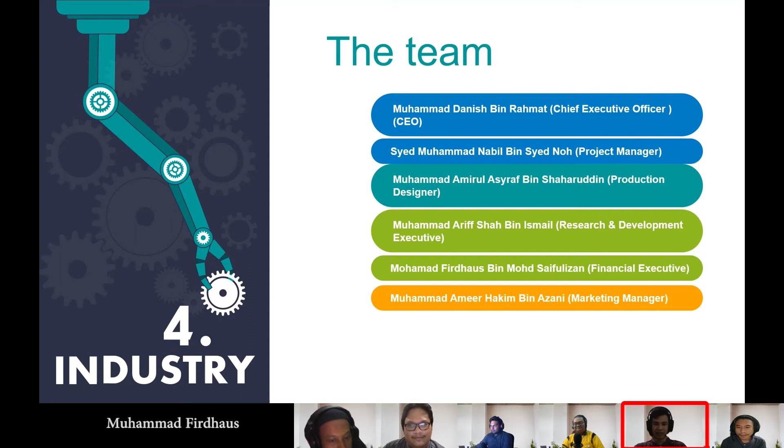So for our company background, first our company profile. Samsan Tech Team is a Malaysian tech-based company that explores the world of automation and robotics to meet the global growing demand and supply. We are specialized in designing, manufacturing, marketing, and consistently improving lawnmowers for various kinds of industrial and commercial use. We also inspire to be a leading company in the globe in the field of designing and manufacturing lawnmowers.

So our company location is in Savanna Lifestyle Retail, B-G-28, Jalan BBLS 2, Bandar Baru Lembah Selatan, in Dengkil, Selangor.

So for our nature of business, Samsan Tech Team is formed to produce a product with an addition of innovation to the product. Next is to produce a product with high quality and improvement to the current existing product in the market. Third, we will produce a very high technology product line in line with the current market status, which is Industry 4.0. Then lastly, we will continue to produce products with improvements that are user friendly and can help to ease our daily life.

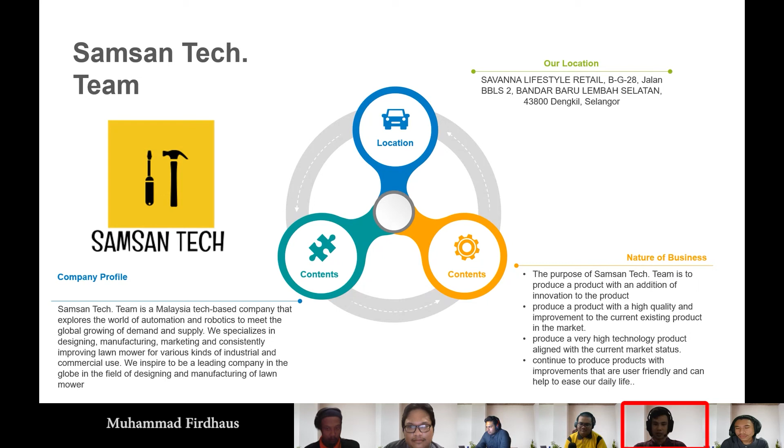So why do we need innovation? First is to catch up with advances in technology. The connectivity and integration of data means more revenue streams are being created. Second, established firms that leverage existing assets in exciting and profitable ways.

Why we need innovation also is to maximize the globalization of connectivity, to adopt a free market economic system, hugely increasing their own productive potential and creating fresh opportunities for international trade. Third is to reduce the barrier to global trade and bring new global agreements for promoting trade in goods, services and investment. Lastly is to completely outperform its competitors and venture into new markets by enhancing customer experiences.

I will pass to Syed Muhammad Nabil.

Hello, my name is Nabil. So I will be explaining about the background of the existing product when we took the initiative to make some innovations regarding the product. So the existing lawnmower that we always use has a lot of disadvantages. In this explanation I will divide this into two things: why the product needs to be innovated, and second, the problems that we are facing with this product.

So as a conventional lawnmower, it is used by the public to cut grass. The blades of the lawnmower are generally powered by pushing the mower forward. So this is very basic. So the problem with the conventional lawnmowers we use nowadays is that it uses gas as its power source. And with gas powered lawnmowers comes pollution. So our product would reduce pollution.

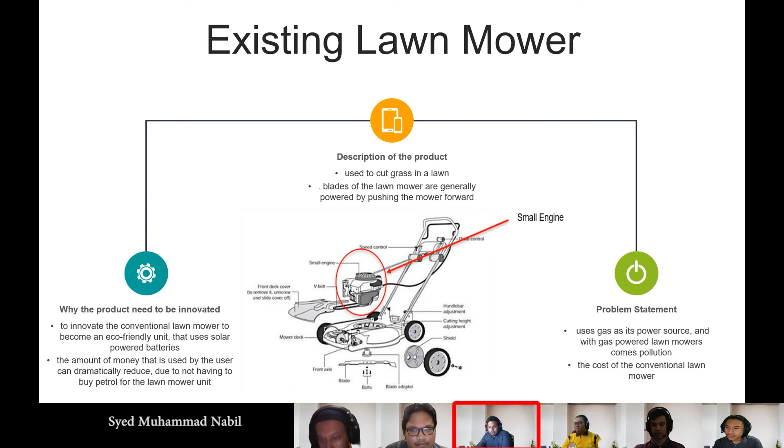Also, conventional lawnmowers cost a lot for people to buy these days. So the difference between our product and the conventional lawnmower is that our product uses solar powered batteries, which is very eco-friendly. Secondly, the amount of money used by the user can dramatically reduce due to not having to buy petrol for a conventional lawnmower. That's it for me. Now Arif will continue the slide.

Now I will continue with the innovation of the product. The types of innovation that we will choose are two types: radical and also architectural. Can we go to the next slide, please? Thank you. Okay, now I will continue with the radical type of innovation.

Connecting a controller to the internet, the action of the autonomous lawnmower can be coordinated and automated to a greater extent than ever before. It can complete tasks intelligently with minimal human input. Next, it has a means to perceive the lawnmower's surroundings to determine precise localization, accurately detect and fix moving objects, and measure distance to those objects.

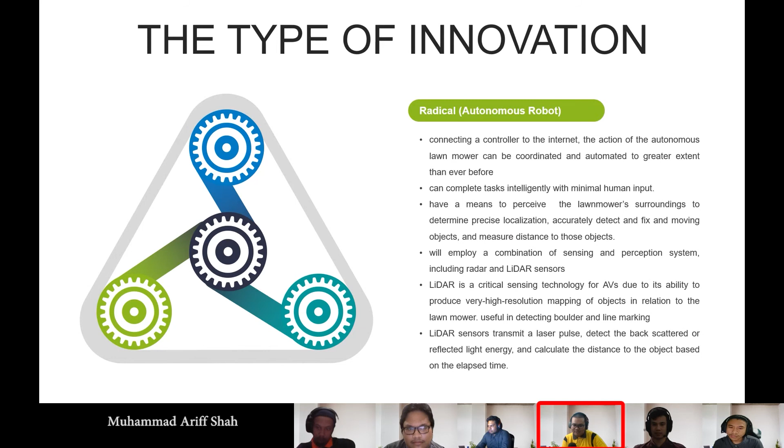Next, we employ a combination of sensing and perception systems, including radar and LiDAR sensors. LiDAR is a critical sensing technology for AVs, that is automated vehicles, due to its ability to produce very high resolution mapping of objects in relation to the lawnmower, useful in detecting boulders and line marking. The LiDAR sensor also transmits a laser pulse, detects the back scattered or reflected light energy, and calculates the distance to the object based on elapsed time.

Aku ke? Thank you, Arif. Okay.

The second type of innovation for the architecture is the thin solar panel design. Harvesting solar energy does not have to mean using a huge solar panel anymore. Thanks to innovation in solar film technology, this solar film can be produced in roll, which greatly reduces both cost and installation. This product is equipped with a thin solar panel.

This technology is truly a renewable energy source. The user does not have to buy petroleum and other fossil fuel. It can be harnessed in all areas of the world and is available every day.

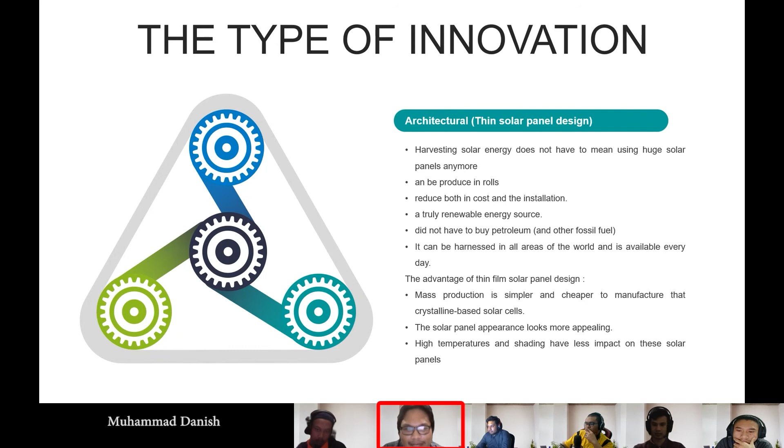For the thin solar panel system, the advantage is mass production is simpler and cheaper to manufacture than crystalline based solar cell. The solar panel appearance looks more appealing, and high temperature and shading have less impact on this solar panel.

For the product categories, we consider our product a breakthrough product. Based on our research, the product has a lot of advantages compared to existing lawnmowers. This product is categorized as an improvement product. The implementation of the autonomous system changed the work process.

The user does not need to manually control the lawnmower. Unlike humans, robots do not get tired. An autonomous lawnmower can work constantly around the clock to meet the targeted task. This is very beneficial as the user would not have to worry about the time consuming lawning process. Furthermore, the autonomous lawnmower is more accurate than a human as it is assisted with precise algorithms.

Moreover, the autonomous system has been improved by using a sensing and perception system. The application of solar energy as a renewable energy to replace existing non-renewable energy technology for the lawnmower gives benefit to the environment. The solar cell generates energy that produces no greenhouse gas emission, unlike fossil fuel, and reduces some types of air pollution. Hence it reduces global warming.

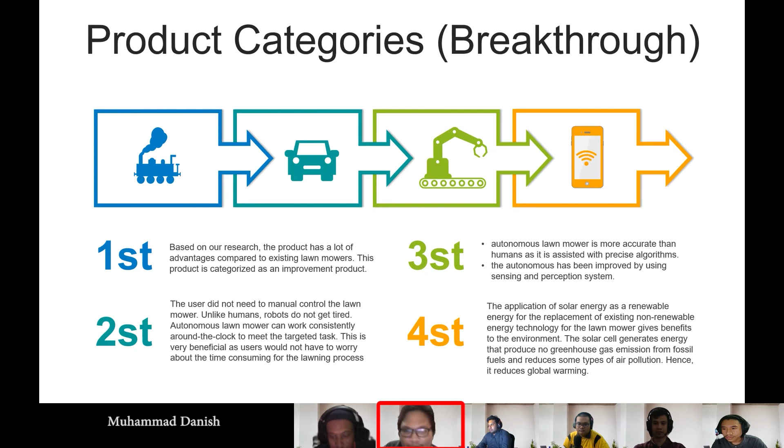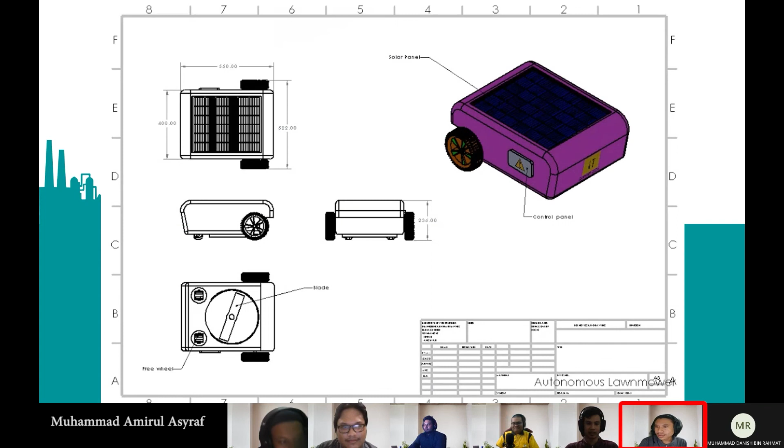For the next slide, I will pass to Amirul. Thank you, my name is Muhammad Amirul Asyraf. I will present about the autonomous lawnmower model. So this is our model, and this is the dimension of this model.

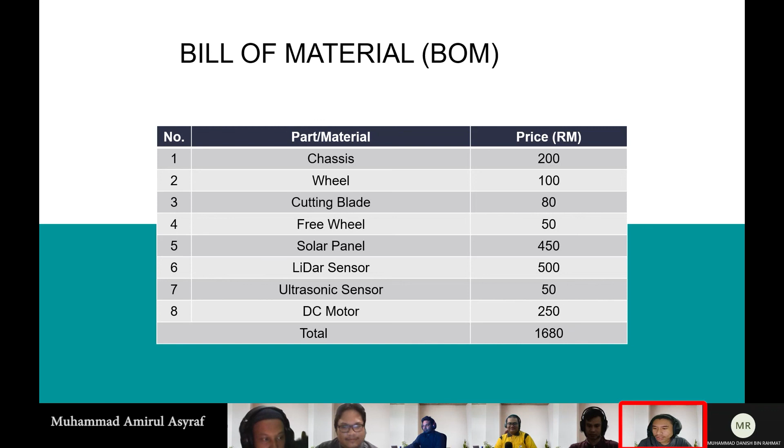RM1,680. So for this autonomous lawnmower, the first is usability. The main purpose of the product is that users are never required to take control to safely operate the lawnmower, known as autonomous or driverless. They combine sensors and software to control, navigate, and drive the vehicle.

Originality: LiDAR sensing technology, a combination of sensing and perception system, and a thin solar panel design — truly a renewable energy source. For functionality: used as part of regular lawn care, it saves time and effort mowing the yard. Just one click from a smartphone can activate the autonomous robot to mow the yard effectively.

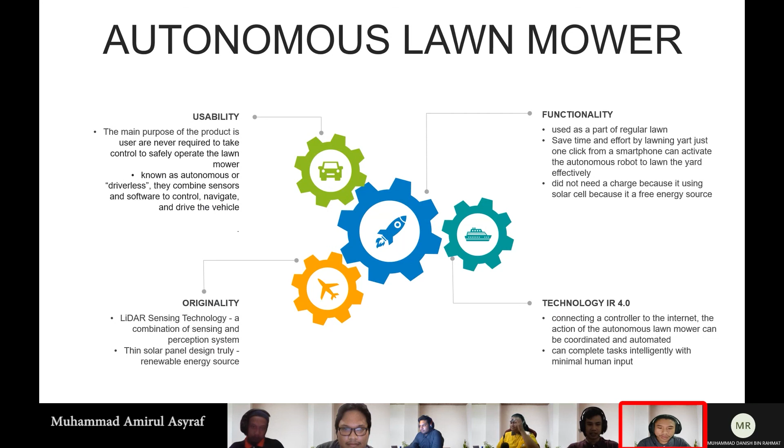It does not need a charge because it uses solar cells, a free energy source. Technology IR 4.0 connects a controller to the internet. The action of the autonomous lawnmower can be coordinated and automated, and can also complete tasks intelligently with minimal human input.

My name is Muhammad Ameer, I'll be focusing on target market. Target market refers to a group of potential customers to whom a company wants to sell its products and services. Our target market is male gender, aged between 35 to 55 years old, living in a large city.

And having a house with a garden area between 1,000 to 2,150 square feet of grass, with a household of 4 to 5 people and average income between 40,000 to 50,000 per year. So the benefit and value of the product.

Cleaner for the environment: the product uses a solar power battery that will last longer and will not give that much impact to the environment. LiDAR sensing technology is able to produce very high resolution mapping of objects, useful in detecting boulders and line marking, as well as tracking objects or pets.

This product is also faster compared to other methods of cutting grass, and is less expensive. The amount of money used by the user can dramatically reduce due to not having to buy petrol for the lawnmower unit. It is also autonomous: it uses a sensor system, multiple programming options, and an onboard computer to cut your lawn with very little input on your end.

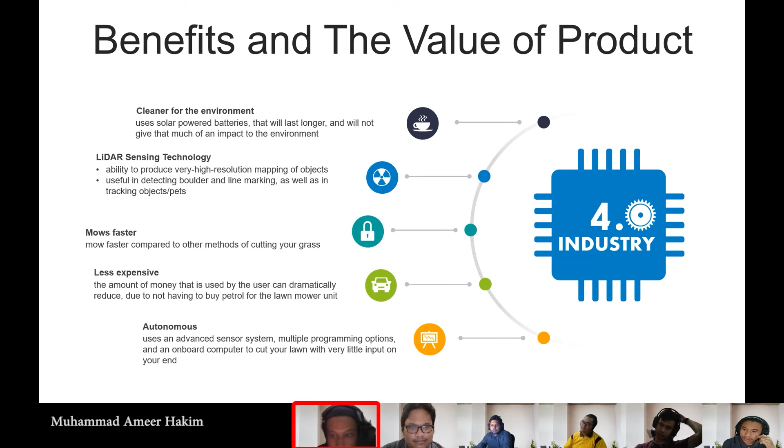As a conclusion, getting started is the hardest part as there are many ways to approach innovation. Small improvements eventually lead to bigger and better ideas that may one day become revolutionary. After getting started is the hardest part, there are many ways to approach innovation. We are Some Tech team. Impossible is nothing. Thank you.